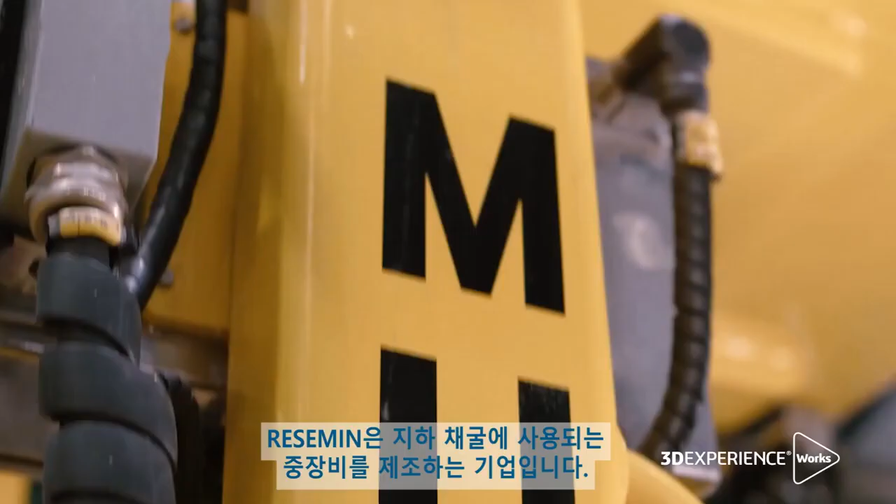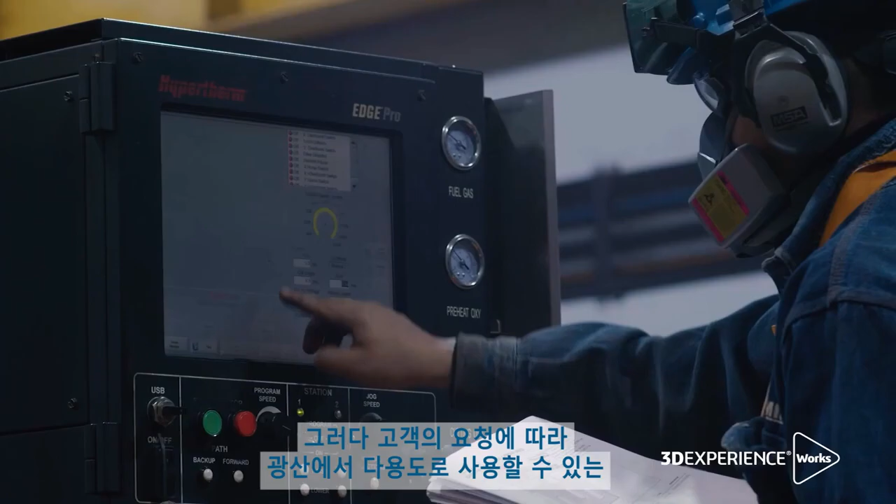RESEMIN is a company that manufactures heavy machinery for underground mining. We started to make machinery in about 2008. Then, at the request of our customers, we started to make more kinds of machines for several uses in the

mine. We need to ensure that the operator will be safe in the cabin of our machines. And not only in the cabin. And about production, we need to ensure that the equipment can make the holes as big as the company needs.

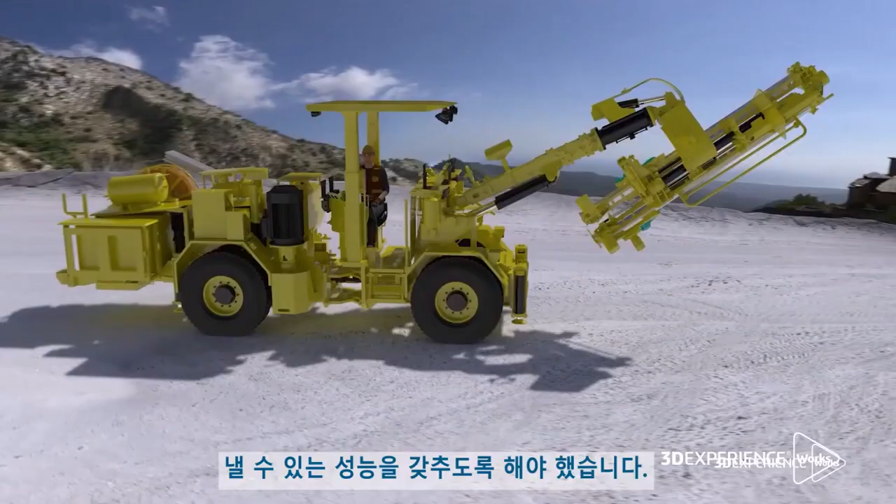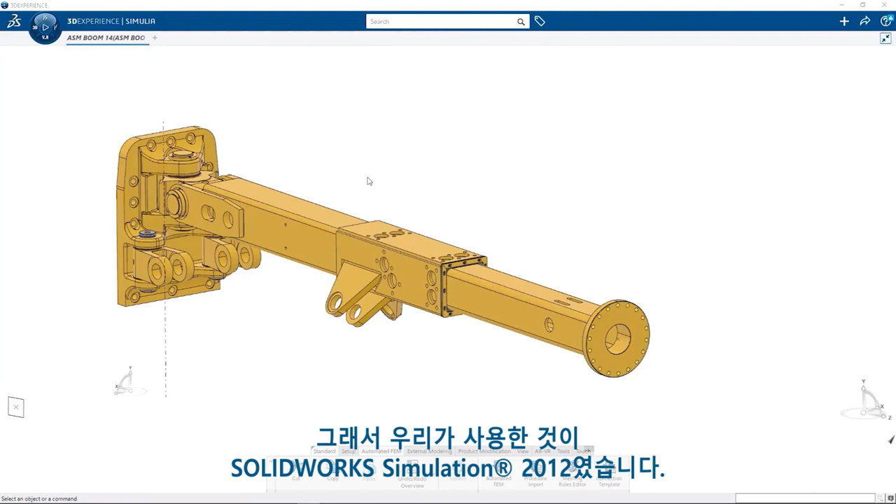Challenges: first, try to design the models as fast as we can. With this, we need to make our analysis about the resistance of the structures in less time with more accuracy. We started to use SolidWorks Simulation in 2012 because the customers asked us for some certifications, and we started to use SolidWorks Simulation to make these kinds of studies.

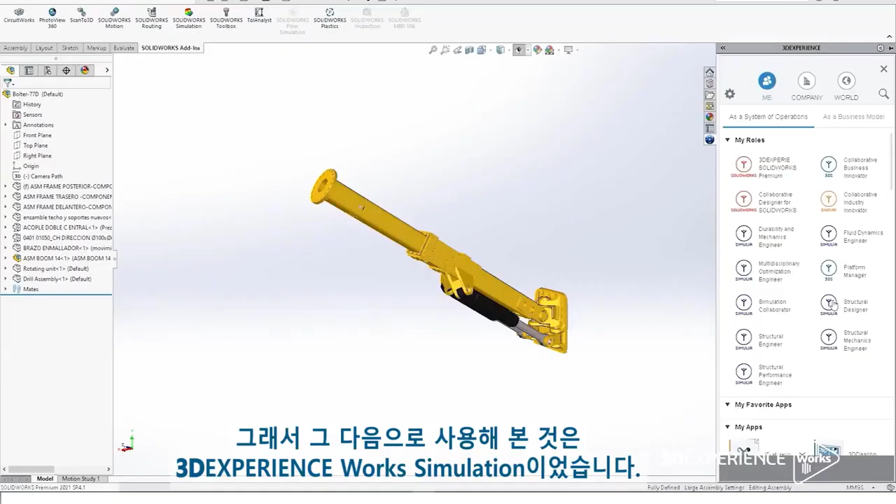Last year I was making this same test in SolidWorks Simulation Premium, and it took us about 6 hours. But 6 hours is too long for our actual process. And we started to use 3DEXPERIENCE Works Simulation in order to reduce these times and increase the accuracy of the test. So right now it only takes us about 2 hours, and we have an accuracy of about

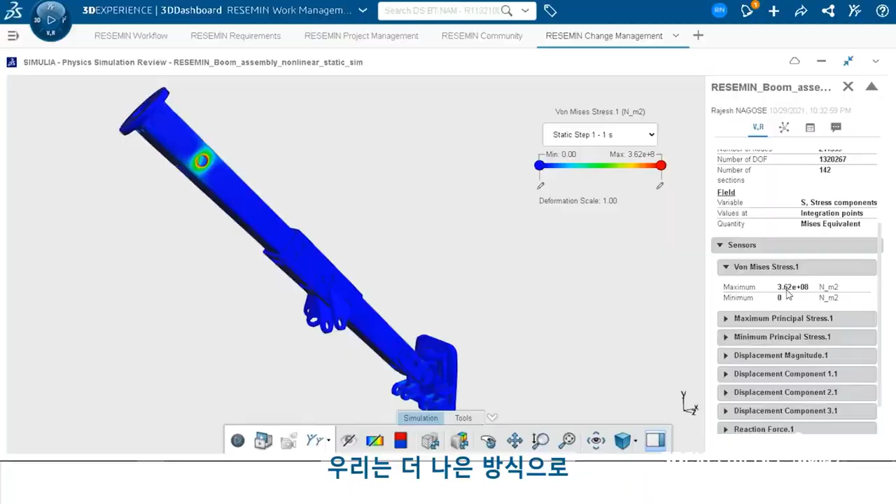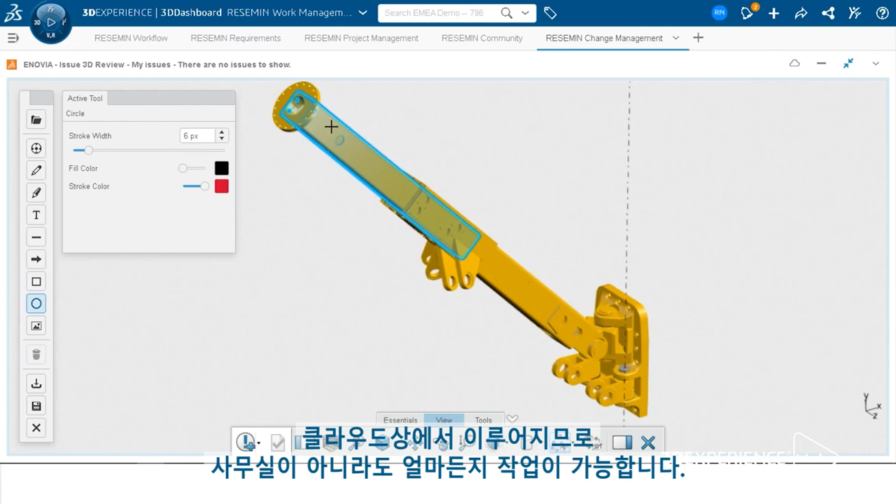92–93%. With the cloud solutions, we started to communicate the results of our simulations to our manager in a better way and in less time. With this, he can make some comments, and he doesn't need to be at the office to see the results and communicate to us the changes that we need to make. So it's about acceleration of the process.

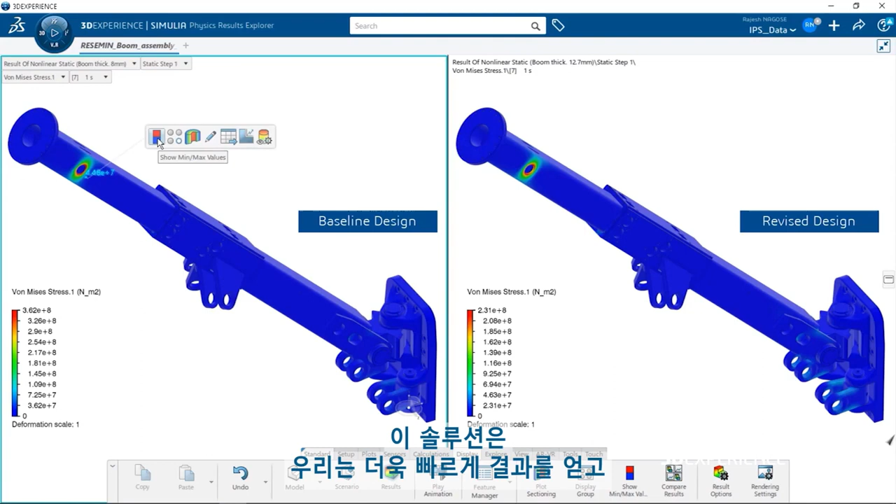The result was that our clients are more satisfied with our machines. I think the platform will help us reach our goals, because it's giving us more velocity to get results and give our production teams the correct information in less time.